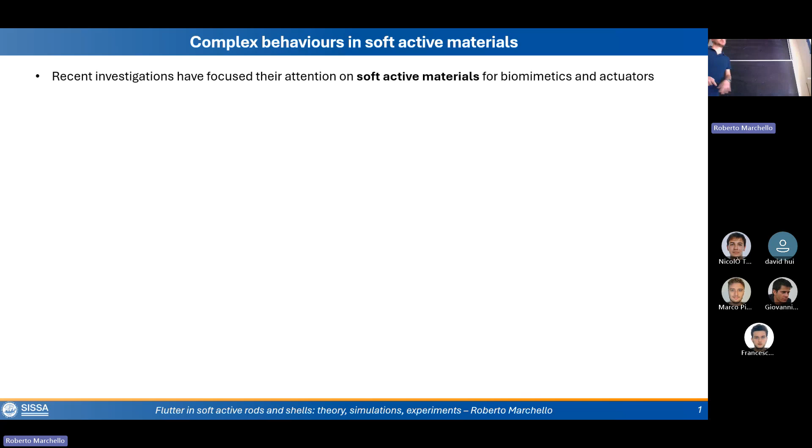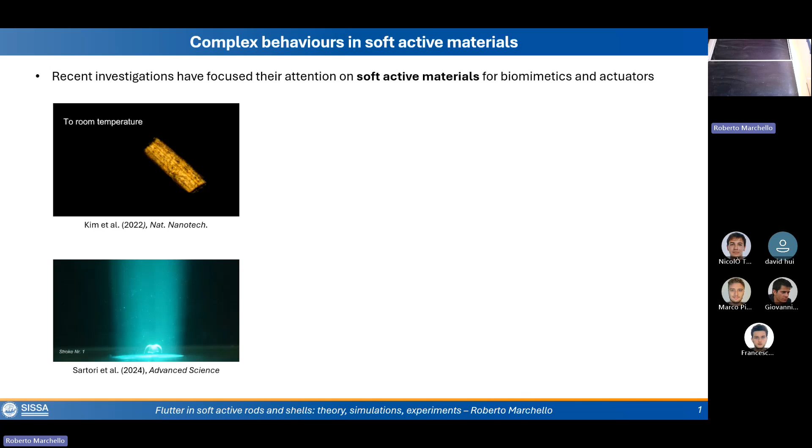So let's talk a bit about some examples of these soft active materials. For example, liquid crystal elastomers that respond to variations in the external temperature and can shrink a lot when the temperature is varied. Such liquid crystal elastomers may also respond to light, to various luminous stimuli, changing their shape. Or gels that respond to complex chemical reactions embedded inside the matrix, or that can be programmed to generate a certain 3D shape at the fabrication stage.

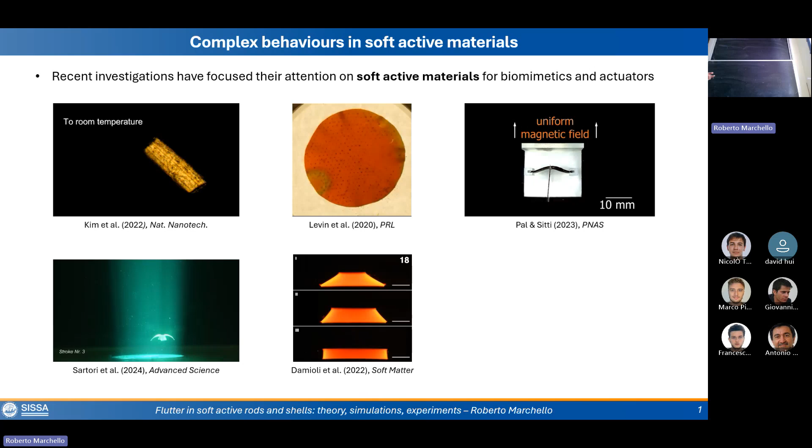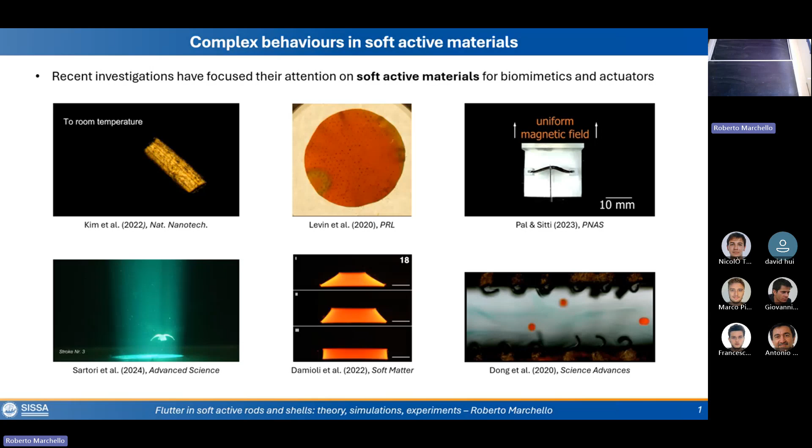Or again, systems that can lose stability like this when a certain magnetic field is applied: the stable system becomes unstable and has 2 bistable configurations. Or complex magnetic fields can be exploited to generate actuators that drive fluxes at low Reynolds number and generate net thrust in a certain direction. In particular, it has been shown that complex responses can be achieved from simple stimuli in active rods, for example through Flutter instability, which is a dynamic instability.

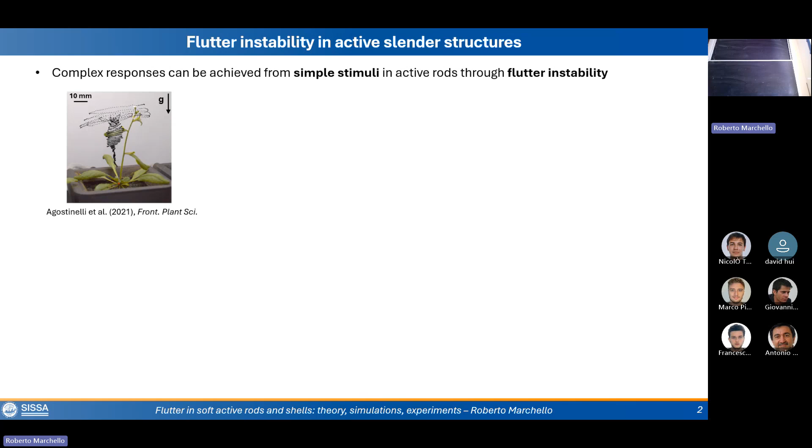These have also been reproduced in polyelectrolyte hydrogels that respond to an external electric field. In this work, it has been shown that such gels can exhibit self-sustained large amplitude oscillations under the action of a constant electric field and of gravity. Such oscillations are non-reciprocal, in the sense that they are not time reversible, and they can be exploited to generate thrust at low Reynolds number, for example to fabricate micro robots that swim in the direction of the electric field. These are instances of Flutter instability, a dynamic behavior consisting of blowing up oscillatory motion.

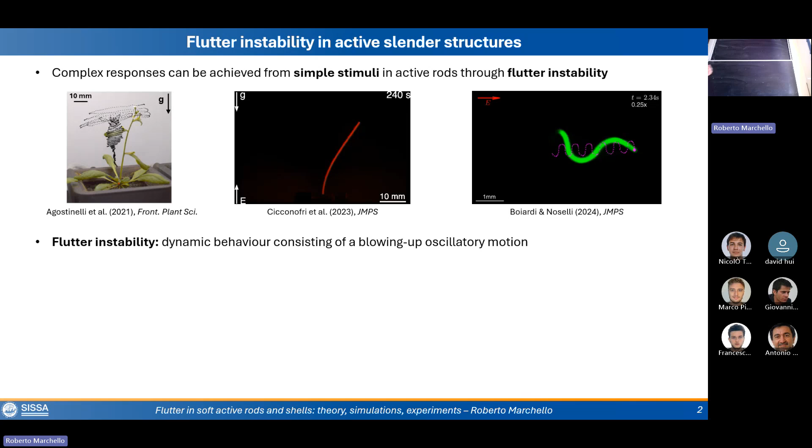From the point of view of mathematics, how to see if a system undergoes Flutter instability: for us, it's just a way to say that if you have a dynamical system, nonlinear in general, you find an equilibrium, you want to study the stability of this equilibrium, so you linearize around it, you study the eigenvalues of the linearized matrix, and you pick the one with the largest real part.

And for me, I say that the system is in Flutter if the real part is positive and the imaginary part is not zero. So sometimes it can be an instance of Hopf bifurcation where limit cycles are reached, but sometimes not. And of course, if you want to say that it is a Hopf bifurcation, you have to prove it and you have to compute the eigenvalues explicitly. Sometimes you can, sometimes you cannot.

And this is just to say that in our system, as we will see in the next slides, once the mechanical system is built, we rely on linearization of the equation to understand whether Flutter may occur or not, and to predict, based on the model parameters, when Flutter may occur. But then a linear solution with this eigenvalue will just exponentially grow in time, and to see the actual limit cycles, if they are reached or not, you have to rely on nonlinear simulation.

In fact, if you simulate something that is linear, you just see a growing amplitude oscillation, exponential in time. It is not feasible at a certain point once the nonlinearity becomes important. Whereas if you solve numerically, or analytically if you can, a system which is nonlinear, maybe you have the possibility to see these complex behaviors. So basically, that's it.

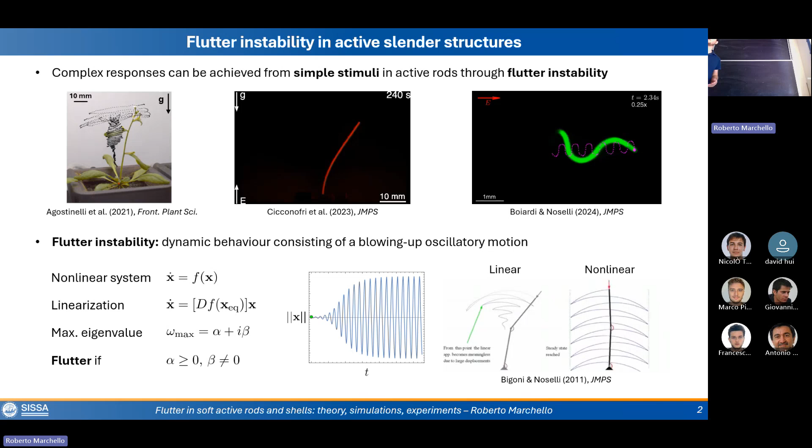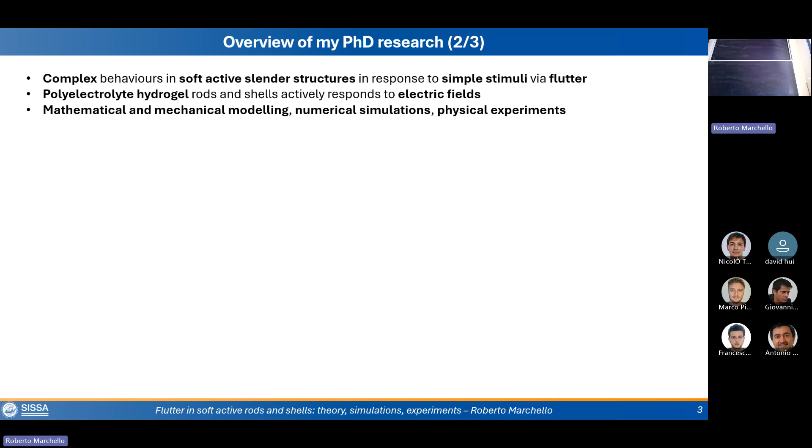So the ideas are that soft active slender structures may respond to simple stimuli via Flutter, exhibiting complex behaviors. And in particular, I'm studying these polyelectrolyte hydrogels, as I mentioned in the previous slide, that actively respond to electric fields, through mathematical and mechanical modeling, numerical simulations, and physical experiments. And I'll show you about 2/3 of my PhD research, because there is another project that I'm not showing here.

If you want to come to my PhD defense, you will see, because of course you will be there because you will have your defense too.

So today I would like to talk about 3 projects. 2 that concern the mechanics of slender rods in 2 dimensions and 3 dimensions, the first in collaboration with Ariel Boiardi, the second in collaboration with Ariel Boiardi, Pietro Santucci, Davide Riccobelli, and Giovanni Noselli, and the third one concerning shells, so extension of such models to more complex structures, in collaboration again with Pietro and Giovanni. And in the last part, we'll see also some experiments.

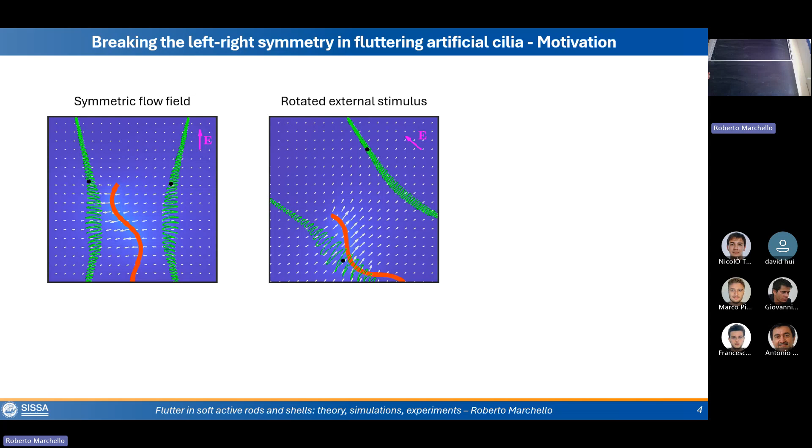But the idea is, can we design material and geometric properties of such rods to generate thrust at a certain angle with respect to the electric field? The applications of this are basically in microfluidics and in actuators, because you can think of an array of ciliary carpets in which each filament, each rod, can be programmed to generate thrust at a certain angle. So put together, they can generate complex fluxes and complex thrusts in the fluid.

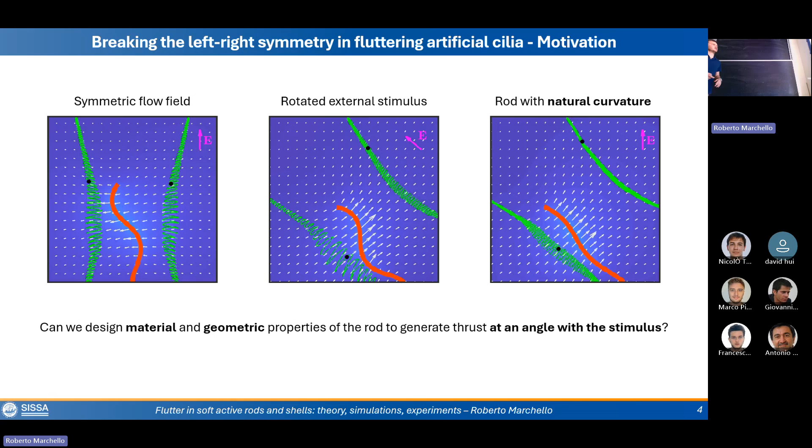And the result, I'll show you how, is that if we embed the rod with a natural curvature, we are actually able to generate a thrust at a certain angle, but in response to an electric field that is straight in the vertical direction. So the modeling part of this relies on the morphoelastic theory of rods in two dimensions, which actively deform in response to electric fields. And I'll just go very briefly over this.

A rod for us in two dimensions can be identified with a curve, and you can identify a curve R that makes an angle theta with the vertical, a tangent, and a normal. And since the problem is in two dimensions, this is enough to identify the rod. In this way, you have no twist or something like this that would need proper modeling in three dimensions. And you write the balance equations. If you don't know them, it's fine, just focus on what the key ingredients here are to have Flutter and to have the elasticity.

Of course, these gels are in fluid solution, so the fluid structure interaction with the external environment needs to be taken into account. We are doing this in the simplest possible way, with a viscous drag that is just linear with respect to the velocity of the filament, with two coefficients.

And I want to focus just on why this rod is called morphoelastic, not just elastic, and how we can encode the activity in response to the electric field. If you have an elastic rod that is straight, it generates a bending moment if you curve it. So if you curve it, you generate a bending moment, you have elastic energy on the rod, if the rod is purely elastic.

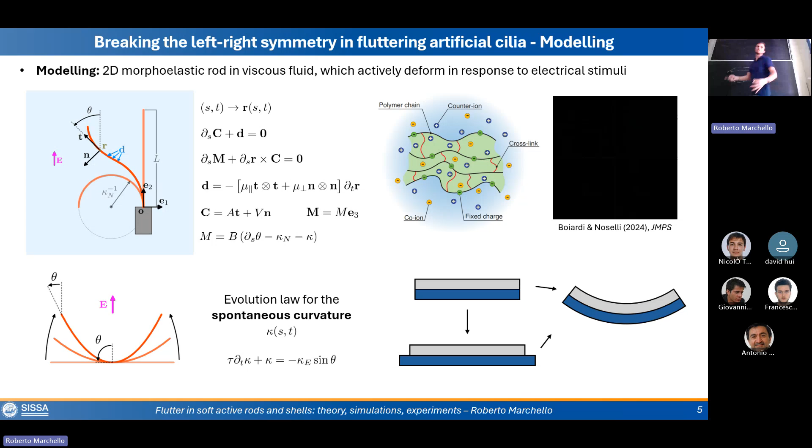So even if the mechanics is very complex and very different, basically what happens is something very similar: the gel, once you apply the electric field, would like to shrink on one side and enlarge on the other side. Instead of doing this, it bends, more or less, just to give you an idea of what's happening.

And then you build the machine, as I mentioned before. You have a mechanical system which is nonlinear. You find the equilibrium configurations, which in this case are not straight because you endow the filament with a natural curvature. So when you apply the electric field, this rod will unwind until a certain limit angle is reached. And once you find this equilibrium configuration, which can be written analytically, you linearize around it.

And so from a nonlinear system, you arrive to a linear system. You want to find the stability, so you assume such time harmonic expansion; it's like searching for the eigenvalues. It's basically the same thing. But at this point, D and K are not matrices, but are differential operators, because the system depends on S.

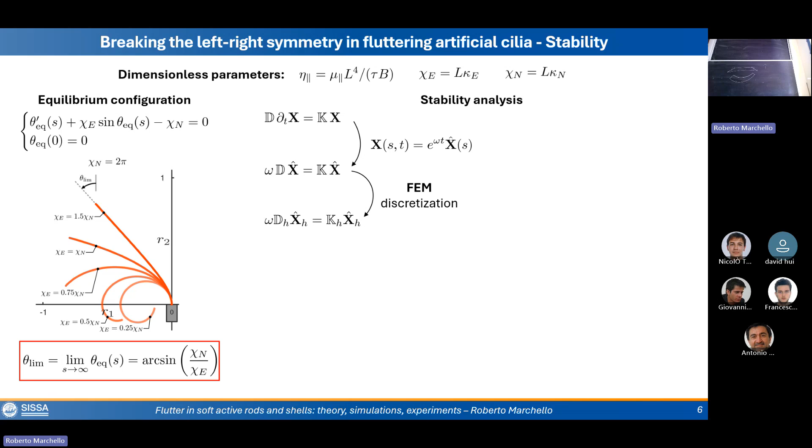So if you want to compute the eigenvalues, if you can solve the problem analytically, that's fine. Sometimes you cannot, and you can rely on, for example, finite element discretization to actually have discretized matrices from which you can compute the eigenvalues. And again, you can understand whether the system is in a stability regime or in a flutter regime, in the sense that if you perturb such equilibrium configuration, you get oscillations that return to the equilibrium, or you have flutter, so oscillations that grow in amplitude until maybe a limit cycle can be reached.

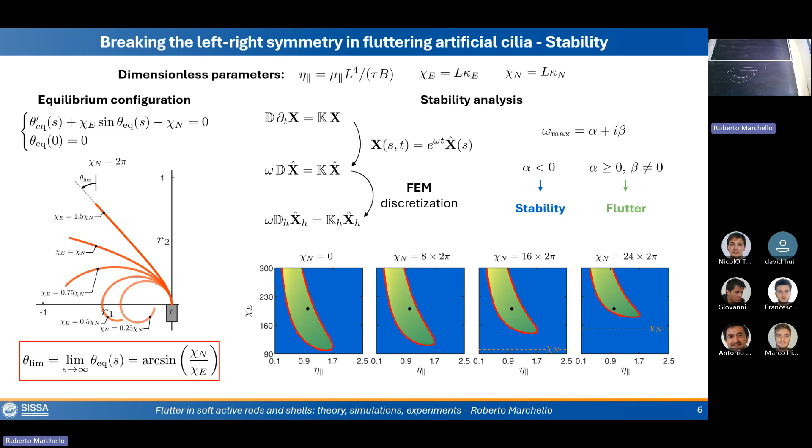And the result here is basically that you have a certain region of stability and instability if there is no natural curvature, so the filament is straight. Once you increase the natural curvature, you would need some electric field to unwind it until a limit angle is reached, and then you can reach again the region of flutter instability. And the idea is that we could generate a thrust at a certain angle with respect to the stimulus. And this is actually done.

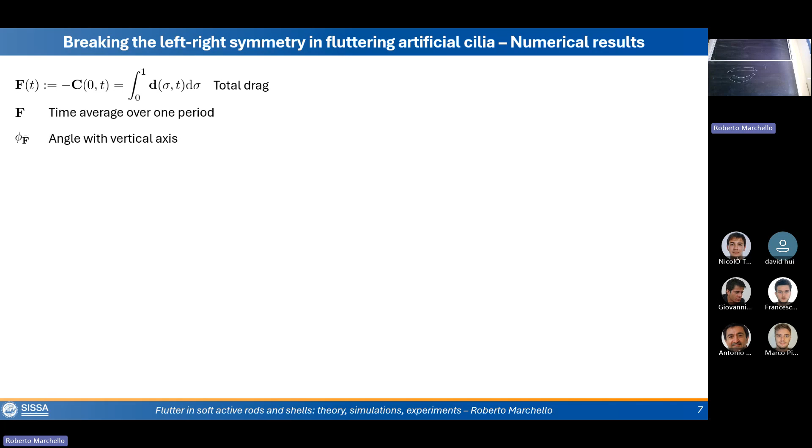To understand it, we can compute the total drag the rod exerts on the fluid. And I'm interested in its time average over one period, of course, because we're looking for cyclic shape changes, and in particular the angle this time average makes with the vertical, because we want to understand how the thrust is with respect to the electric field.

So basically, the result from this part is that endowing the filament with a natural curvature, you can have a thrust at a certain angle, and if you want to increase the angle, you can do so at the expense of the total force you are generating on the fluid.

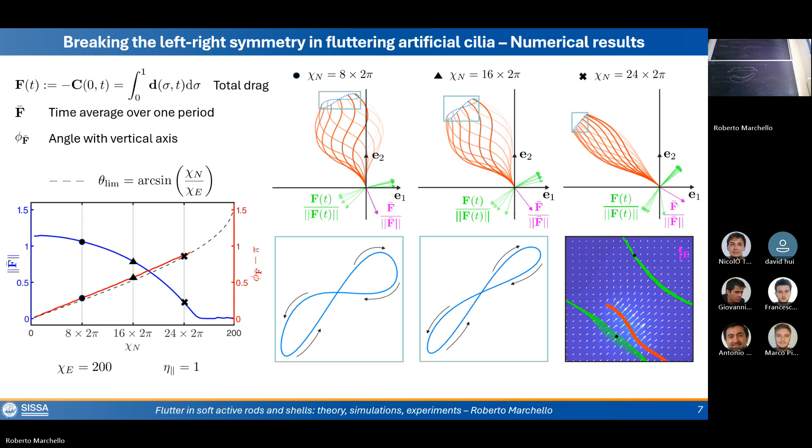To stay within the same line, in the second work that I will just mention in one slide, we extended the model in 3 dimensions. From the mathematical and mechanical point of view, it is more complicated, but the response of the gel rod to the electric field can be generalized also in 3 dimensions. And in particular, we have seen that complex results arise varying the cross-section aspect ratio. What I mean is that now the gel is a 3-dimensional rod with a certain cross-section that we consider in general elliptical.

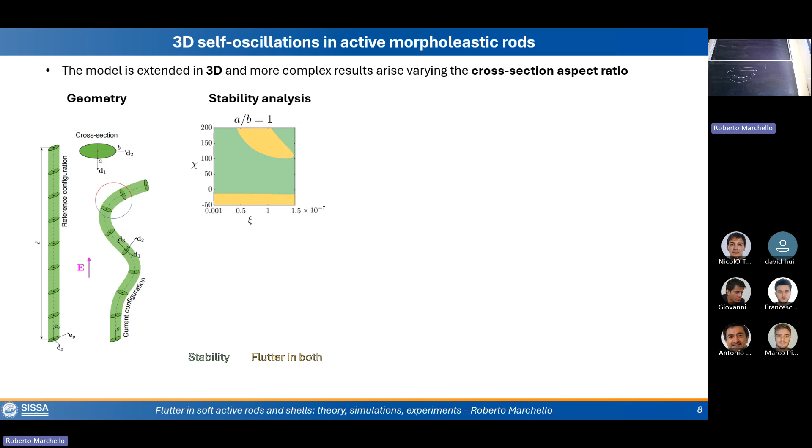And once you build the machinery, so understand the stability and instability of the problem, you see that if the cross-section is a circle, you can have regions of stability and regions of instability, in which flutter may occur in all possible directions, because the rod can move in all directions since the cross-section is circular. But once you have a cross-section that is elliptic, not circular anymore, you have different kinds of stability regions in which flutter may occur in one principal direction only, or in the other principal direction, or in both. So expecting a combined complex oscillation in 3D.

And this is very sensitive to the initial perturbation you do in nonlinear simulation, because, I will start the video in a second, if you perturb the system just in one plane, there is no reason why it should go in the other plane and generate 3-dimensional shape changes. Whereas if you actually perturb it in 3D, you will see that the shape changes that the filament undergoes are actually 3-dimensional. But they do so at very different times. For example, here you may think that the systems are doing the same thing, but here at the right, it has reached the limit cycle. Here at the left, there are very small oscillations that are increasing in the other direction.

Very, very small, until they become visible also in the other direction, generating complex shape changes also in the other direction with different times and with different dynamics.

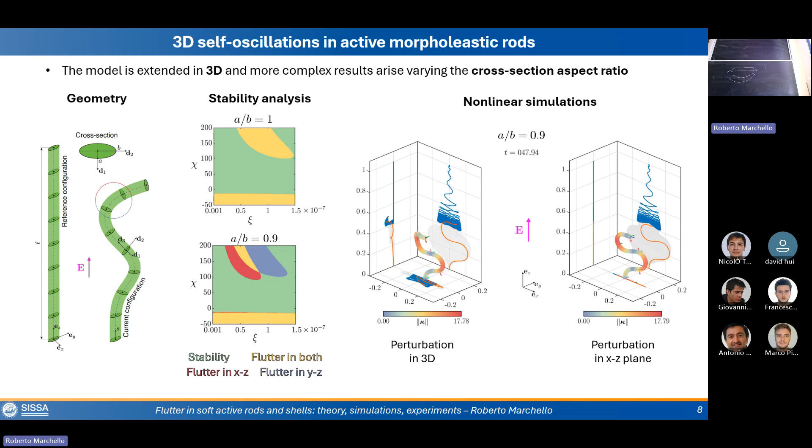Okay, then for the rest of the talk, I would like to discuss the last project. It is basically the main project of my PhD that concerned the extension of such models to more complex structures, in the sense that we no longer consider rods, but we consider 2-dimensional structures, because we are interested in how shells in general, so plates or cylindrical shells or whatever kind of shells made of the same polyelectrolyte hydrogel, may respond to electric stimuli, may exhibit shape changes, instabilities, etc.

From the mathematical point of view, for us, a shell can be seen in the assumption of unshearability. That means basically that something like this, like you would do with a deck of cards, cannot happen. If you assume that this cannot happen, which is basically true if the shell is thin enough, so very, very thin, you could identify a shell with a surface in 3D. So you could use all the tools from the differential geometry of surfaces in 3D that you know.

So basically, the reference configuration of our shell is just a surface in 3D identified by a certain map F0 from the parametric domain, which is the set where the curvilinear coordinates live. And in the reference configuration, once you set the map F0, you can compute the basis vectors, the normal, the metric, and the curvature, which are the first and the second fundamental forms of the surface in 3D.

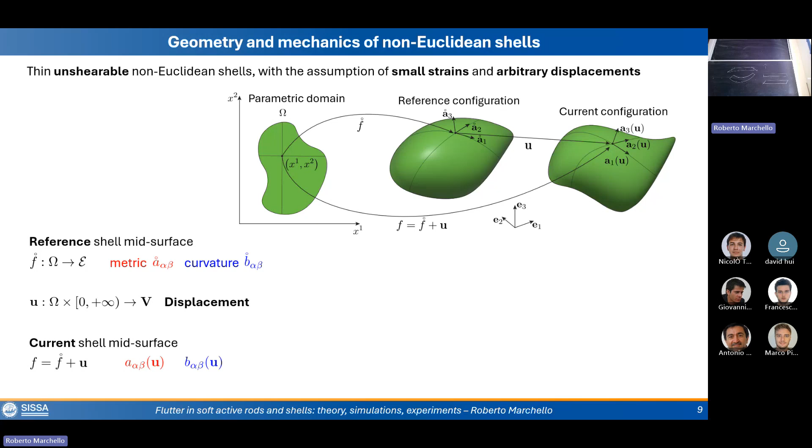But why is the shell called non-Euclidean? Because I forgot to mention before that the fact that our material actively responds to the electric field may be encoded using the theory of non-Euclidean shells. Our shells are called non-Euclidean because the stress-free configuration is not the reference one, as with normal elastic shells, but is identified via a natural state, which is identified via a natural active metric and an active curvature.

But this metric and curvature are not the first and the second fundamental form of a surface in 3D, in the sense that a map F bar does not exist. This is why the shell is called non-Euclidean, because this cannot be embedded in the three-dimensional Euclidean space. So all the strains are measured with respect to this natural active state, which in principle you do not know, and it depends on the activity of the material with respect to the electric field or whatever you may want to consider.

And I'm just going very quickly. G measures change of metric of the current configuration with respect to the natural state, so if you stretch a surface, and R measures change of bending, so change of curvatures. If you change the curvature of the surface, you bend it, you generate G or R, and N and M are the corresponding forces. So forces related to stretching and moments related to bending.

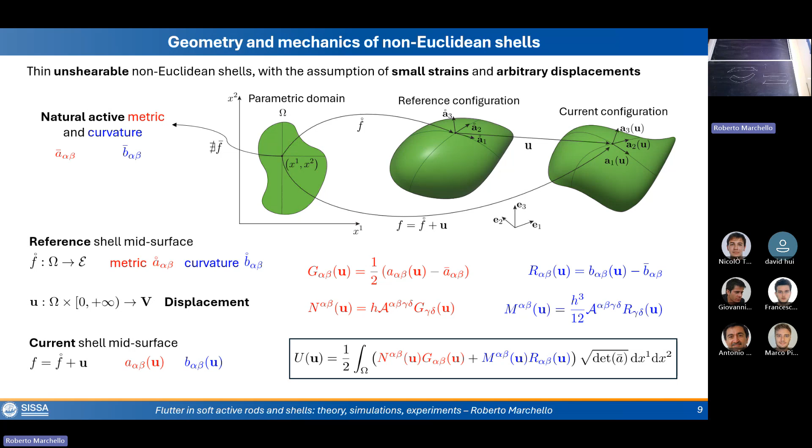This is why, for example, if you have a sheet of paper, you cannot stretch a sheet of paper, but you can very easily bend it in all directions you want. Okay, with this in mind, now we want to specify what these natural metric and curvatures are for our gels.

And again, I'll show you this again when we talk about experiments, but because of the complex internal structure of our gel, we have seen that they respond to electric field if there is a component of the electric field along the thickness. For example, a one-dimensional gel in this way will have no response, whereas in this way will bend with a characteristic time and a target curvature, as we've seen for rods.

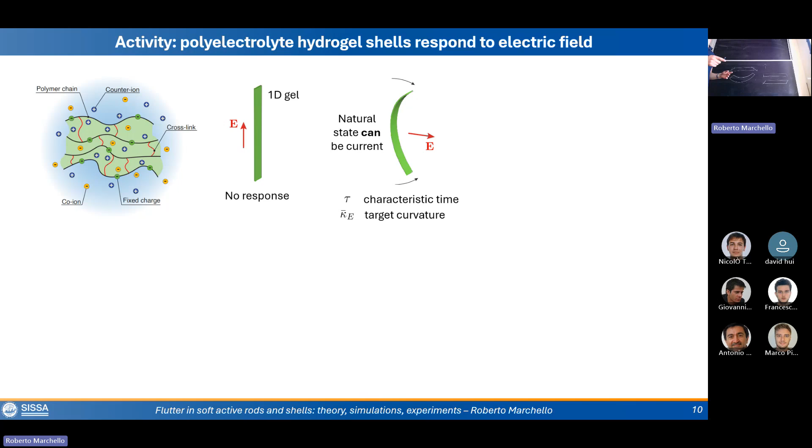What would happen in shells? Of course, in this case, the actual configurations we have seen in the experimental video before are states in which the system is at zero energy because of the activity. And this natural state can be current, can be reached. We're not talking about non-Euclideanity in rods, for example, because there is just this bending.

Whereas in shells, there is no implied preferred direction, so the curvature would generate in all possible directions; it would be spherical. And this can be encoded in the model, saying that the active metric is the same as the reference one, but the active curvature is the same as the reference one, minus or plus, depending just on the convention, a spherical curvature. That is, this spherical curvature would arise if you put the gel in this way.

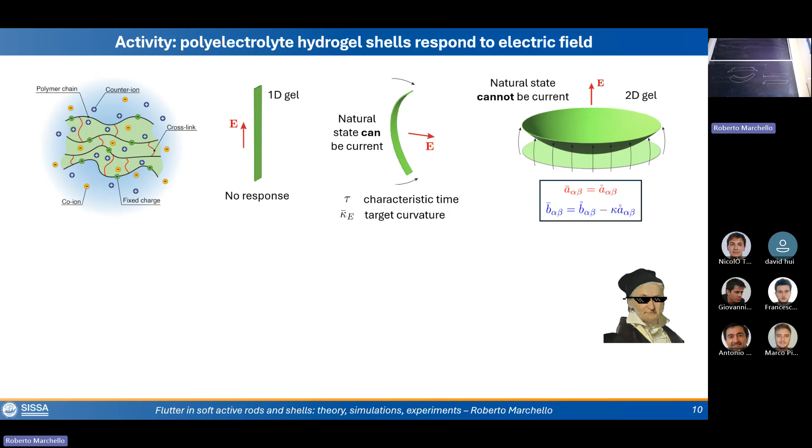And the problem is that this natural state cannot be current because a surface cannot have the same metric while changing the curvature with a double curvature, because of Gauss's Theorema Egregium, which says that the Gaussian curvature is an invariant under isometries. So this is not possible. And this is basically why, again, the shell is called non-Euclidean. Okay, so what will happen is that instead of having this as the current state, maybe the shell would prefer to just bend in one direction, accumulate energy, but not stretch.

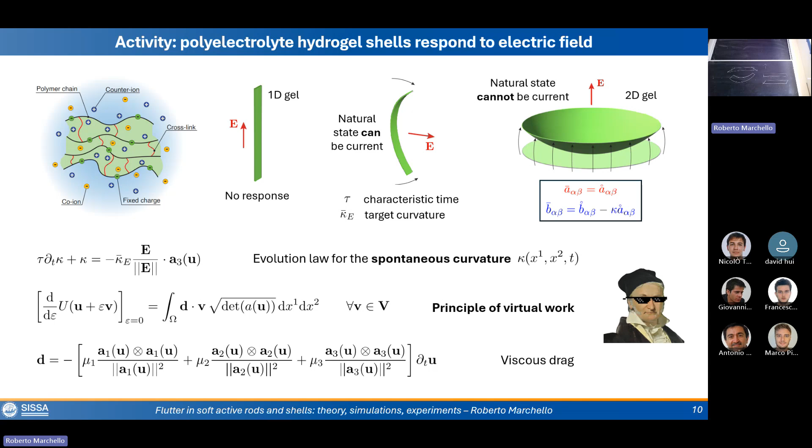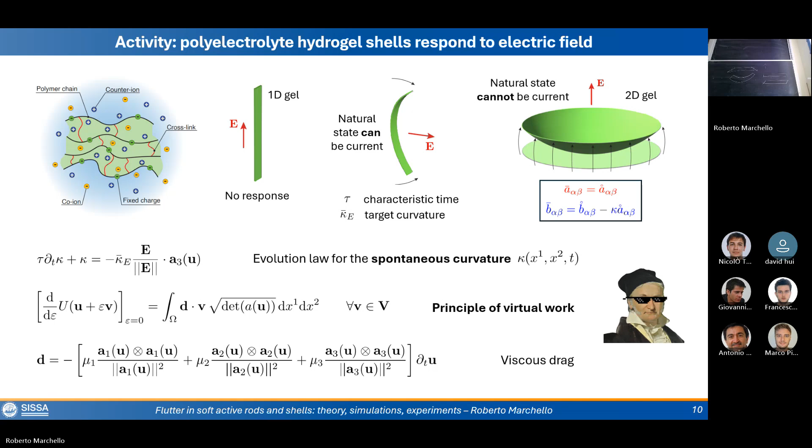Okay, with this in mind, then the equations, just going very quickly, can be generalized into two dimensions by the principle of virtual work, with the viscous drag, with the external electric field, and the external viscous environment is modeled again in a very simplified way, linearly with respect to the velocity. Okay, now we're going to see some results.

So you have to choose the geometry of the shell you want to consider. And the first thing we have done is consider plates, elliptic plates, to understand whether the 1D model could be easily extended, because of course, if you consider a plate where one axis is much smaller than the other, you would basically have the same result you would have in a one-dimensional setting. So once you fix that, you can do whatever you want, in the sense that you have your equations written and you can solve the equations numerically.

And here I just want to show you how to see the non-Euclideanity again, because the target curvature that would make the plate stress-free is spherical, but the metric would be Euclidean. So this cannot be reached. A stress-free configuration cannot be reached. Any state of the plate would always have a residual stress inside, not zero energy. In this case, the equilibrium is trivial, so no displacement and no curvature.

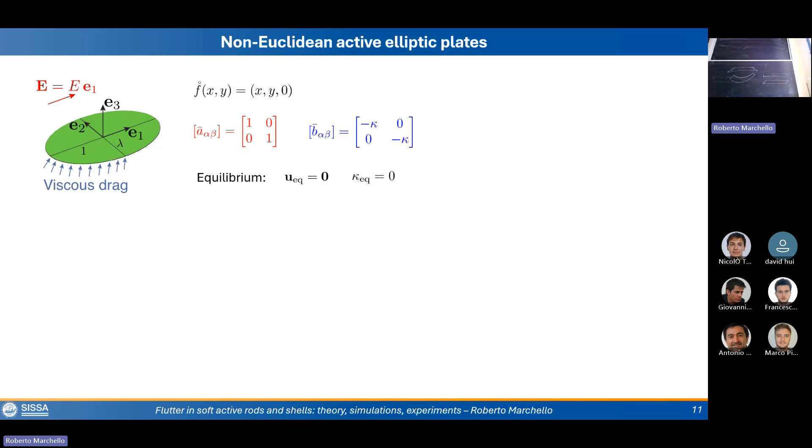And again, with the same machinery as before, you can understand whether the system is in a stable regime or in a flutter regime in which we expect oscillations of growing amplitude. And here I just wanted to say that since the linearized system involves a bilaplacian, to solve it via the finite element method using conforming elements, you would need something like the Argyris element, which was used in the simulation and in the linear stability results.

Also, this was done with fixed lambda, so fixed lambda 2/3, because it will be the one that we will use in experiments. But you can change also one of the semi-axes and consider different geometries, and plot not only the maximum eigenvalues, but also the corresponding eigenfunctions, which are the eigenmodes, the shape that you expect your plate will exhibit when increasing the amplitude of the oscillations.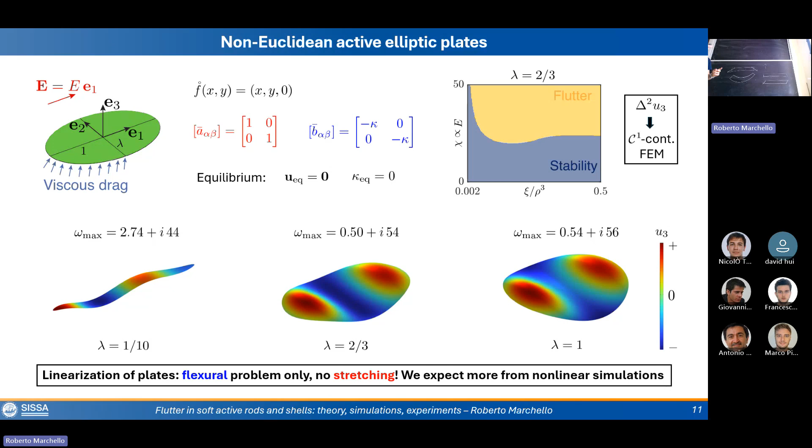decoupling of the energy. So this means that in real experiments and in real nonlinear simulations, we will expect that these shapes, when the oscillation is high, will be prevented in some way, because we expect that such plates will have almost no Gaussian curvature or very little, so something like ruled surfaces or developable surfaces. And this is the case of what will happen. In fact, we will just see now some simulations.

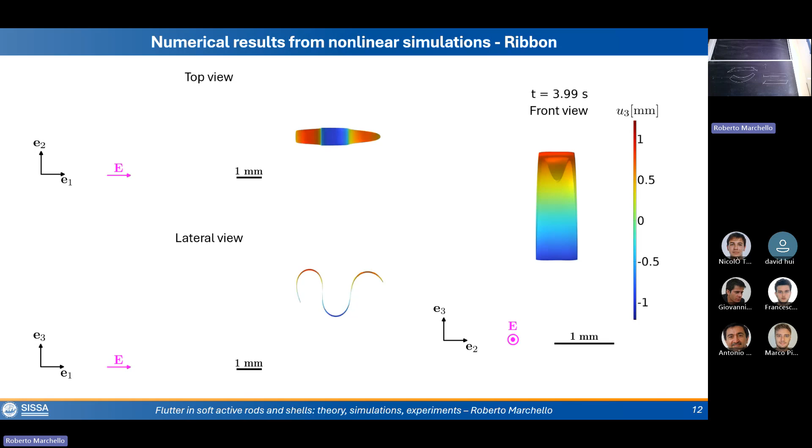Even if the ribbon is considered, so the ratio is 1/10, you see this oscillation of growing amplitude if you are in the Flutter regime. And it is very similar to the results we've seen for the one-dimensional case in the first video, that was the work of Ariel and Giovanni. For example, here plotting the transverse displacement with respect to time, you see the oscillations. They are growing very slowly. At a certain point, the exponential part becomes important. And once the nonlinearity becomes important because the displacements are high, this limit cycle is reached. And once the limit cycle is reached, you see the ribbon swimming in the direction of the electric field.

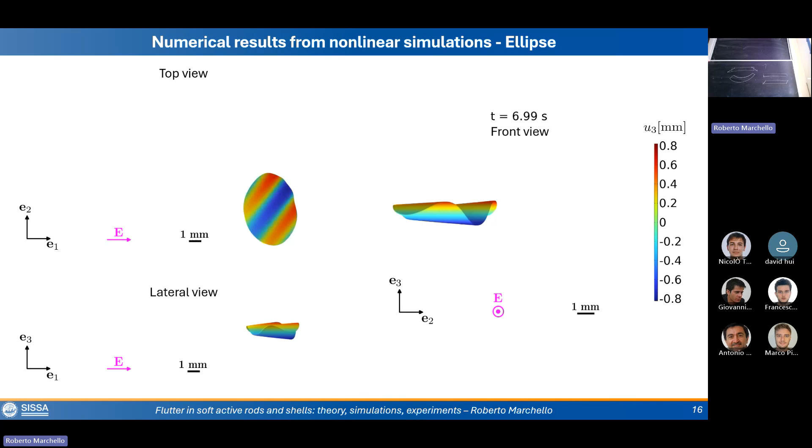And what happens here is that if the electric field is above the critical value of Flutter, you start rotating, but at a certain point you may stop. Or if it is well above the critical value, if you increase the electric field a bit, you can have this complex trajectory that I showed you in the first slide. So you rotate, then it changes direction, rotates the other way, and continues this behavior periodically. So we could identify a very small period in terms of shape changes and a larger period in terms of what happens from here to here. Okay, that was it for the numerical simulations.

But then, as I mentioned before, we have not limited ourselves to numerical simulations for the plates, but we have also, with the great help of Pietro and Giovanni, fabricated and performed the experiments at the laboratory here at SISSA.

Now, for the third time, I come back to this picture, but maybe now I show you something better, which is how is a gel made? In the sense, what are the components? The gel is made by a polymeric chain. So there is a polymeric matrix formed by polymeric chains and crosslinks between the chains.

And the concentration of crosslinks basically gives you how stiff the gel is, in the sense that if you imagine these crosslinks are much more distributed, the gel will be stiffer. And then it is made polyelectrolyte, so it can respond to electric field because there are also fixed charges embedded within the matrix. And then it actively responds to electric field, not only because of the fixed charges, but because the gels are in an ionic solution, so basically water with sodium chloride, salty water, as you would do with pasta.

So here is the recipe of the pre-gel solution you would need before the gel. So basically, acrylamide gives you the polymeric chains, bisacrylamide gives you the crosslinks, sodium acrylate gives you the fixed charges, and then there is an initiator because the formation of the gel will be catalyzed when UV light is applied.

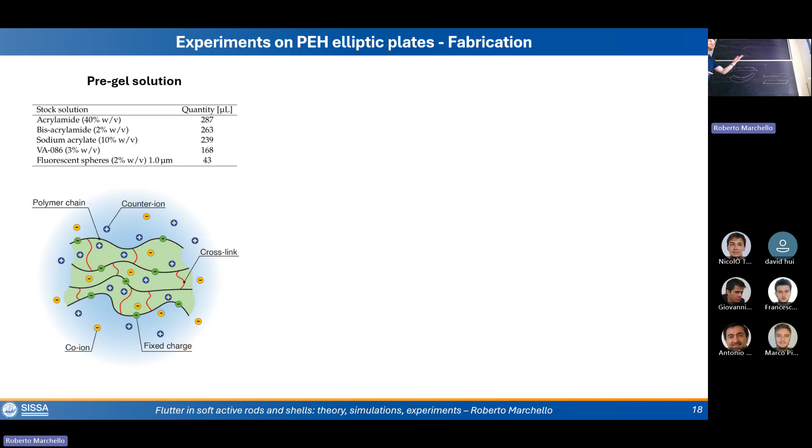And then we will need fluorescent spheres for many reasons, but basically because these gels are transparent if you fabricate them without any fluorescent sphere, so you actually do not see them anymore. You cannot take them. If you have also fluorescent spheres, once you apply a certain UV light, a certain LED light, you will have them respond to the light and see, for example, in green or in any color. It depends on the sphere you put inside.

So what happens is that you have this pre-gel solution. You put this solution between two glass slides, and you project the shape you want to fabricate, an ellipse, for example. You project this shape on this solution. So once the UV light is on the solution, the photoinitiator triggers the chemical reaction. They make the gel fabricated, basically.

So you end up with plates of the dimension of the shape that you have projected, which, once they are swollen in salty water, in our experiment are basically 7 millimeters long and 30 microns thick, more or less. So I would say that we are in the thin assumption that we have said before, because there are more than 2 orders of magnitude of difference between the lengths.

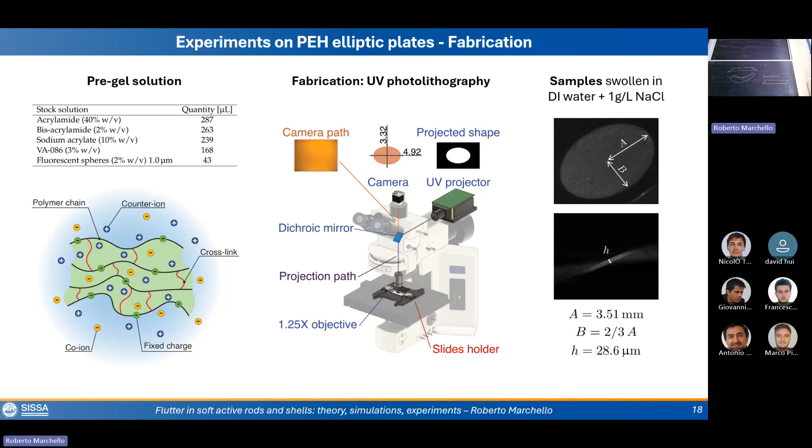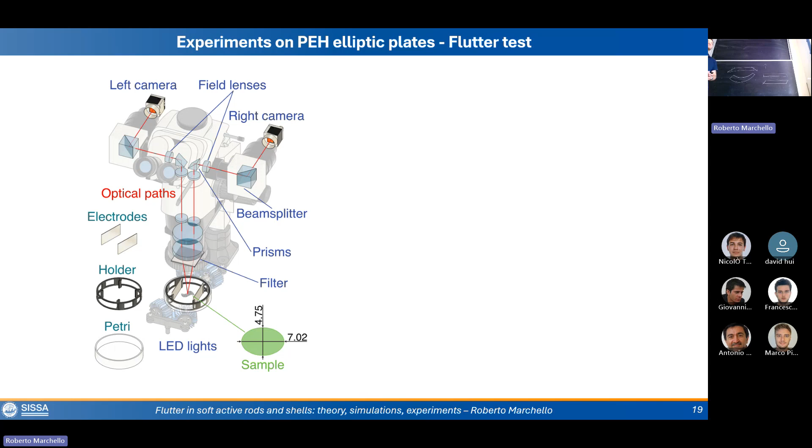And once you have your plates made of gel, you can put them in a petri dish with salty water with 2 electrodes that are attached to an electric current. Of course, you apply a certain voltage at the electrodes, and so with a good approximation in the middle between the electrodes, you would have a constant and uniform electric field. You place your gels inside, and hopefully you will see something happen.

And this is the case, in the sense that, at least qualitatively, the experiments are in agreement with the numerical findings: we see complex swimming trajectories arising in these plates as an instance of flutter. And when I say complex, I mean that we can have moments in which the plate swims almost straight or is rotating, as in our simulations.

And on this, I would like also to say that through stereo DIC, which is an optical technique, maybe I do not give the details here, but the important thing is that through this technique you could measure exactly the displacement of the plate, using 2 different cameras to record the images, so it works like our eyes, I would say.

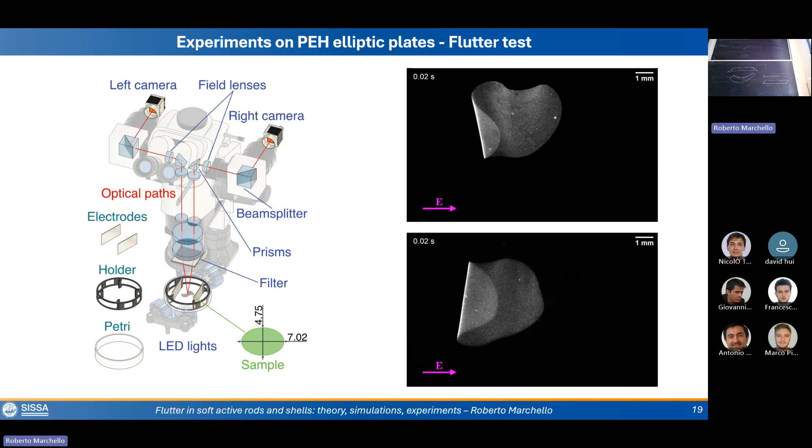If you have 2 different cameras that can look at the object and you know the displacement, you can reconstruct the whole three-dimensional shape of the object, and you could do it at different instants of the oscillation of the experiments. So you can fix a time. You have the transverse displacement here plotted, and you see the shape in 3D.

And I would say that this confirms also the numerical finding regarding the geometric nature of the plate's configuration, in the sense that what we actually see is a surface with almost no Gaussian curvature, as expected by the numerical results. You can continue doing this. We've done it several times, showing also the traveling wave that is traveling in the opposite direction with respect to the electric field.

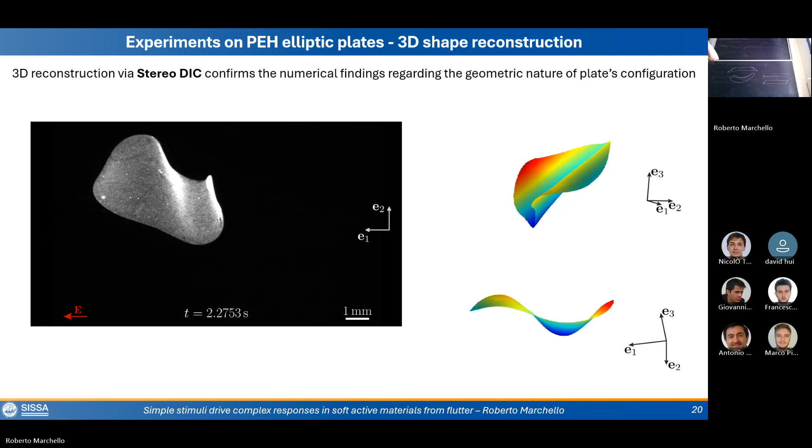Okay, and then very quickly, just to say that, as I mentioned, the model was built in a general way. We have seen results concerning the plates, but we also have results concerning cylindrical shells, for example, because cylindrical shells are maybe a prototype too. This equilibrium configuration is an equilibrium when the electric field is applied in this longitudinal direction. So we expected some traveling wave happening in the cylinder, and it's something that is actually happening.

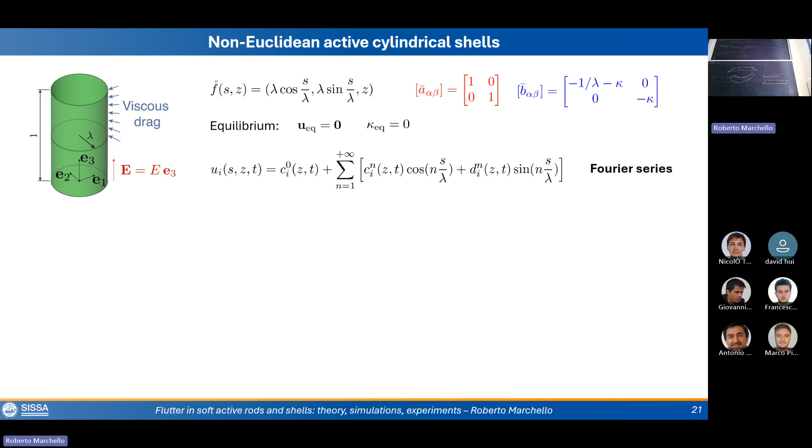And here I just want to tell you that the machinery is basically the same, but what you can do is, exploiting the fact that there is a periodicity in the circumferential direction, you can write the unknowns in Fourier series, and you can decouple the system, going from a 2-dimensional system into an infinite number of 1D equations that are decoupled, which means that for every n, for every circumferential mode, you could solve all the equations separately. So you can understand not only whether the system is in the stable or in the flutter regime, but you could also predict from the model parameters which circumferential mode shape will arise in the simulation in flutter.

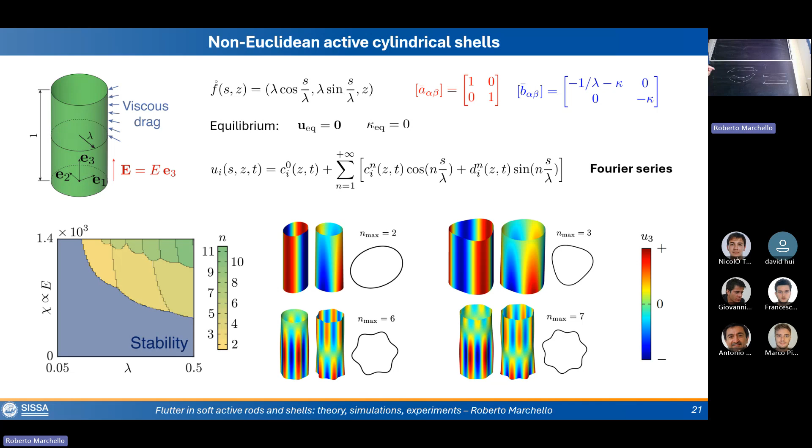So, for example, in this regime, you expect n equal to 2. In other regimes, you expect n equal to 3, 4, 5, 6, 7, for example. And you could predict it from the model parameters via this dimensional reduction. We do not have experiments of this, unfortunately, but the simulation here, I would say, agrees with the model, and differently from plates, here, also at the linear level, the problem is not decoupled between stretching and bending. So there is a much stronger agreement between the eigenmodes we've seen before and the actual shape that arises in the simulations once the limit cycle is reached.

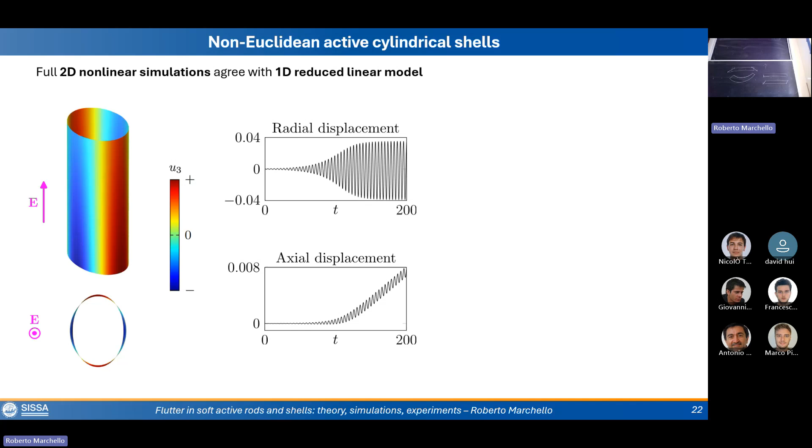If you plot it, you see oscillations of growing amplitude until a limit cycle is reached. And if you do not perceive it, it's swimming not so much, I would say, but it is also swimming in the sense that it's not rotating, but it is moving in the direction of the electric field, as the ribbon would have done, for example. But the order of magnitude here is very different. So in some cycle of shape changes, you do not see it swimming very much. Okay, so I would say that this was it, and I thank you very much for your attention.

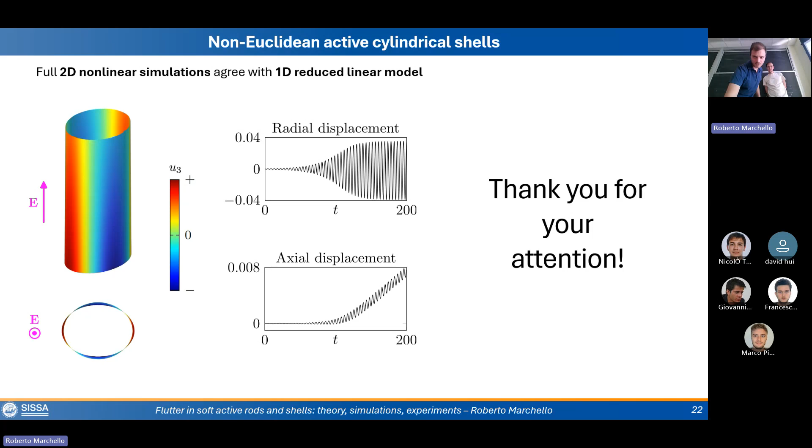Thank you, Roberto. Is there any question here or online? No, I would say that we more or less know anything about it. Yes, curiosity.

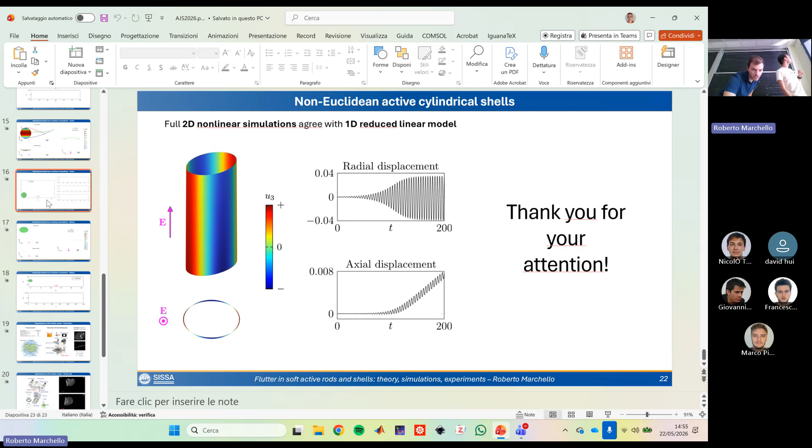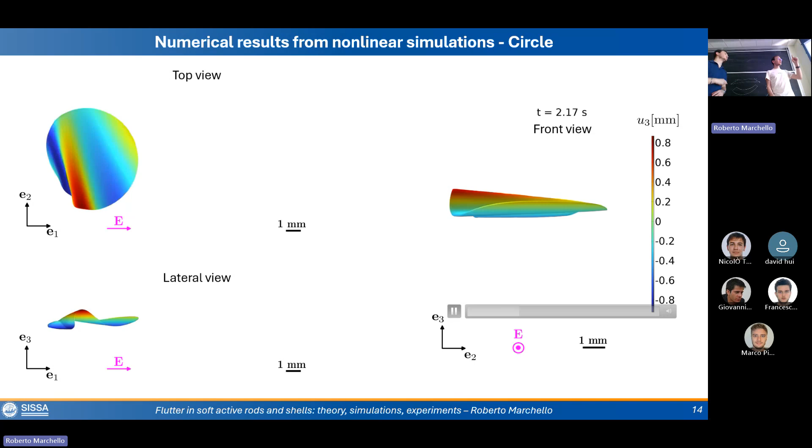In the second part, when you have the plate, the elliptic one, you said that if it is somehow flat, it travels in the direction of the electric field. And if you start making it more circular, you get that periodic shape. But then when you get a circle, do you still have some periodic behavior? What do you mean by periodic behavior? Maybe if you can go to the slide with the simulation. So one was traveling in the direction of the electric field. The ribbon was traveling exactly in the direction of the electric field. And the other one had a periodic movement. So when you have the circle, like in the slide, do you see a very large period or something?

Here, what happens is that it is rotating, and it starts doing it because numerically we understood that straight swimming could be possible in the sense that if you numerically constrain the plate to swim straight, you could see the solution. But once you remove such constraints, it starts swimming in a certain direction. And differently from ellipses, here it just continues rotating and swimming in this direction forever. Makes sense. Whereas on the ellipse, when it rotates, it exposes a different length to the electric field, so the effect of the electric field is different. For example, you can have a rotation that then arrests at a certain point, or a rotation that starts and then goes in the other direction. Whereas in the circle this does not happen, because it always exposes the same part to the electric field.